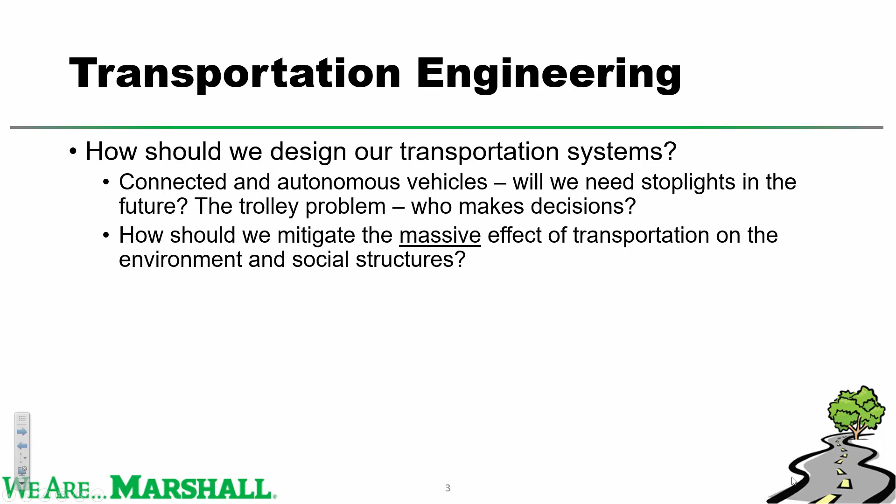Of course, how do we know what road to fix now versus 5 years versus 10 versus 15 years in the future? Can we use open source data and machine learning? Some of y'all might be very interested in computer science, and one beautiful thing we do in transportation engineering is we basically pull a lot from computer science.

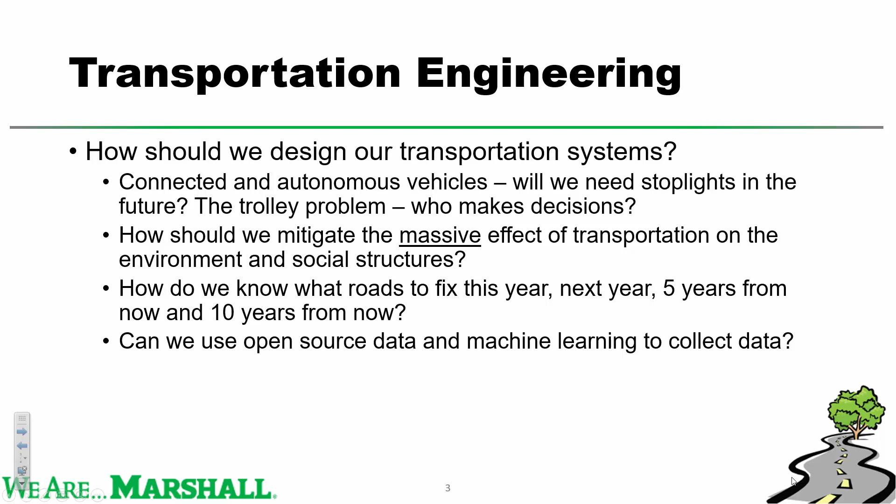So, with that being said, roads fail. We have all experienced it. So it's our job to try to figure out, and it's my job in research and studying and the courses that I teach, to try to better help you all understand how we should manage roads, if you come study with me. My lab is in 2301.

Weisberg 2301, you'll know you're there if you walk in and you see all the 80-inch flat panel TVs. It comes in very handy in March. So my office is inside my lab. Dr. Michelson, I'm sure, has my email address, and he can send it to y'all if you have any additional questions

Or any questions at all. Do you have any questions? Anybody have any questions for Dr. Bryce? Yes.

I do, that's actually, thank you for asking that question. I hire a lot of undergraduate student researchers, multiple per semester. I value it as an educational resource for the students, but also you help me out. I have a problem right now where Dr. Michelson actually offered to work with me on this, and I haven't gotten back to him yet, but I'll just put it out there. I know.

I got a problem right now where I walked into class, and I'm not kidding you, I walk in class, it's a 9 a.m. class, and I hear these words come out of a student's mouth. She says, 'Oh, I love statistics, but you know what was even more fun was my differential equations class.' Not even kidding you, that came out of her mouth, at which point I stopped and I said, 'How much can I pay you to solve this problem for me?'

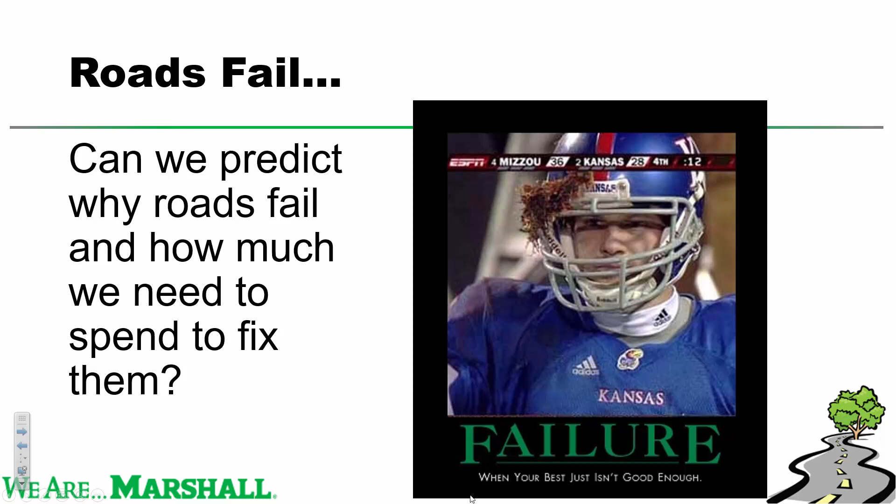And that's the best that Kansas will ever do. I'm sorry, Mizzou grad. Yeah.

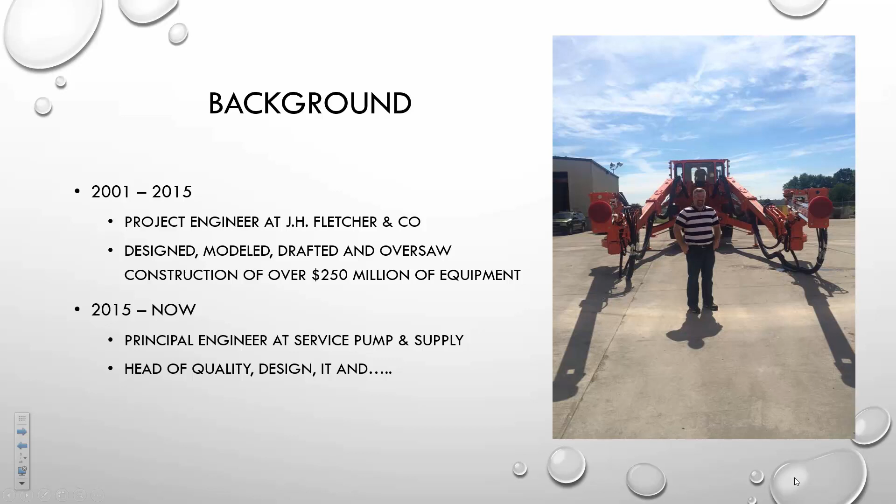I run all of our computer stuff. We've gone through a digital transformation of the company, going from a lot of paper to everything being on the computer and in Salesforce. I'm like our Salesforce administrator, I do all the quality and warranty work, and a lot of the design and sales work. So I kind of have a lot of hands at Service Pump.

So these are the four big things that I like to hit on with a class like you guys. It's the things that I wish I knew when I was sitting here.

The first thing is everyone in the room is smart, right? I'm sure a lot of you come from backgrounds where in high school you were probably near the top of your class, used to making A's, and that's why you're going into a STEM major in college.

So I graduated in '99 from Huntington High. There were 511 people in my class. I was fifth, and I got to Purdue, and I was dumb, right? It was not special at all. I was able to coast through high school, show up, get my A, and didn't have to do much. So I was a good kid, stayed out of trouble, showed up, got an A, had a 4.3, move along.

You can't do that anymore, right? You guys are essentially adults at this point, and you have to be responsible for yourself. A lot of that's going to class. No one's going to make you.

And Dr. Michelson would love to see you guys, and all your other professors, during your time here at Marshall. But the reality is that if you're living here on campus, living away from home for the first time, you're probably drinking a little, playing video games, staying up late, hanging out, have a new set of friends. No one's going to make you come to this room, right?

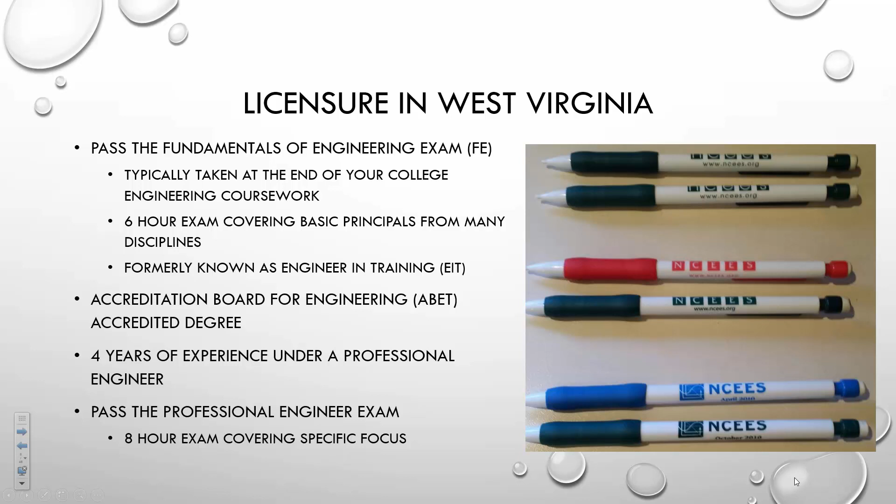At the end of the day, these are still important to me, and kind of a badge of honor for what you have to go through to pass these things, especially the professional engineering exam. I studied for every waking hour - lunch breaks, before work, after work, till I went to bed, all day Saturday, all day Sunday - for about 100 days ahead of the exam. It's a big deal. It's how you become a professional, and how you can essentially go to that next level and do something with the degree you guys are working towards.

So you might ask, what should I be doing now? As a student progressing through this, working as an intern - maybe getting a summer or winter internship - by the way, you should be starting to think about that now. You should be targeting companies you want to work for, writing them, and by the end of the year, like in December, if you want to work this summer, you should have a solid plan in place, probably by January 1. If you wait until May to go out looking, there's probably not going to be a lot of opportunities. So if you want an engineering internship this summer, start thinking about that now.

As a student in groups, or in an internship or a job, you need to be a good team member. Don't be the person dragging behind. Show up, do the work, contribute, and work hard.

The third thing - a lot of what you're doing is learning how to learn. By the time you graduate, you're not going to be able to walk into a job and already know how to do it, but you're going to know how to figure it out. If I give you a new coding language, or ask you to calculate whether a bridge is strong enough, you're not going to know offhand, but you'll know how to figure it out. So a lot of this process is learning how to learn, learning what questions to ask, and learning how to get to the end result you're looking for, as opposed to just being handed an answer.

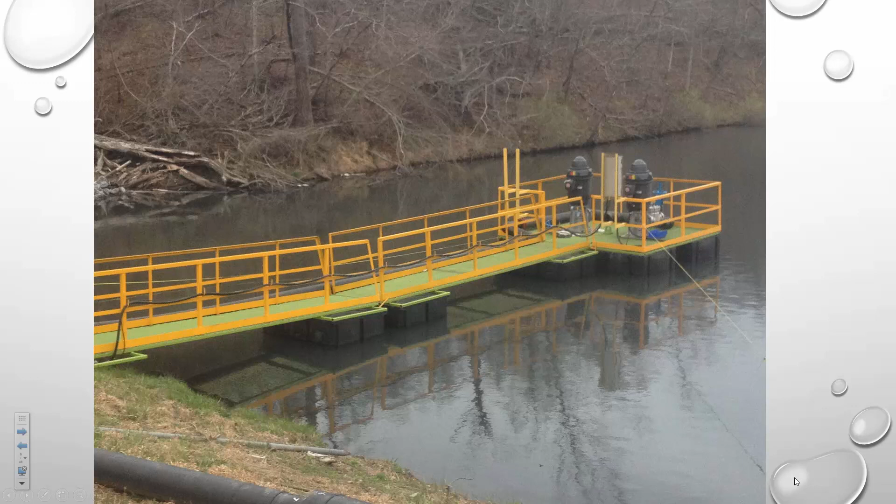Then the work experience. Here's a couple pictures of some projects I've done with Service Pump. We're in the West End. We solve water problems, kind of our motto, whether it's wastewater, clean water, or storm water. We fix things, we sell things, we build things, and we have a fab shop. We repair motors, we build panels, and we have a machine shop.

This is kind of a combination of all those things where you have to figure out how much stuff weighs, how much buoyancy you have in your floats, and do drawings for the walkways and platforms so it's big enough and you have enough space for your piping. This is on a lake somewhere, probably on a coal property, with two big pumps sitting out in the middle of the lake pumping water up into the mine. It combines buoyancy, structures, spacing, and planning, as well as the electrical theory behind running this and making sure it doesn't short out and meets all the safety requirements.

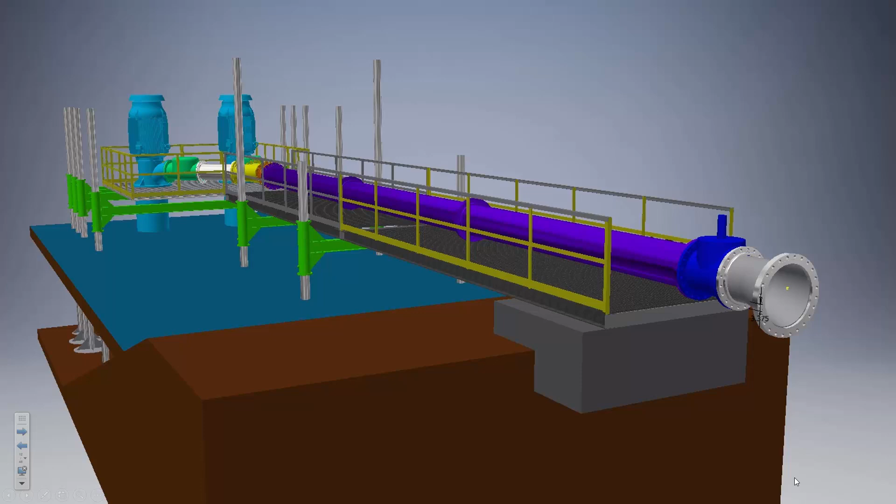So it's not only doing what you're asked to do, but figuring out what can go wrong, fixing what could go wrong, fixing that part again, and then doing it a third time—something else is probably going to go wrong anyway, so you've got to figure it out. But we had a little bit of foresight trying to figure out what the problem was.

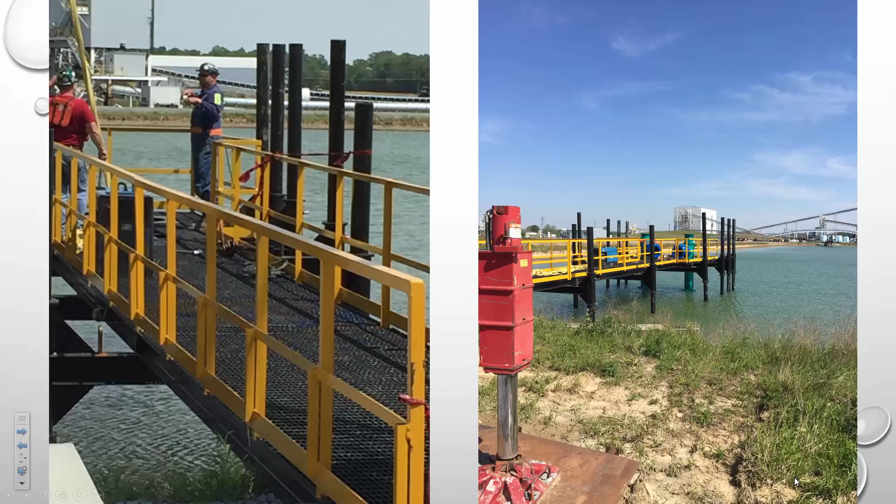This is the actual piece under construction—big cranes, welding it together, being out on the lake while we were doing this. This is a fun project.

It's another thing we did where they didn't even have a lake. So we made big cans to put the pumps in, dug a big hole, dropped these big blue cans down into essentially a hillside, and used a small creek to flood them. We kind of created our own pond, tied them together with this manifold at the bottom, and got gate valves and check valves to prevent backflow.

One of the lessons I learned from this one is that I undersized this manifold at the bottom, so the velocity of the water going through the pipe was too fast.

And what would happen is if I turned on all three of these pumps, the water being pulled out wasn't being replaced fast enough with the water coming in. We were pulling too much velocity through the pipe, and basically they would fight each other. You couldn't really predict which one was going to win, but one of them was going to get the water and the rest were going to starve. So we ended up having to dig it out and put a bigger pipe in to slow the water down, to flood each of these three wells a little bit faster.

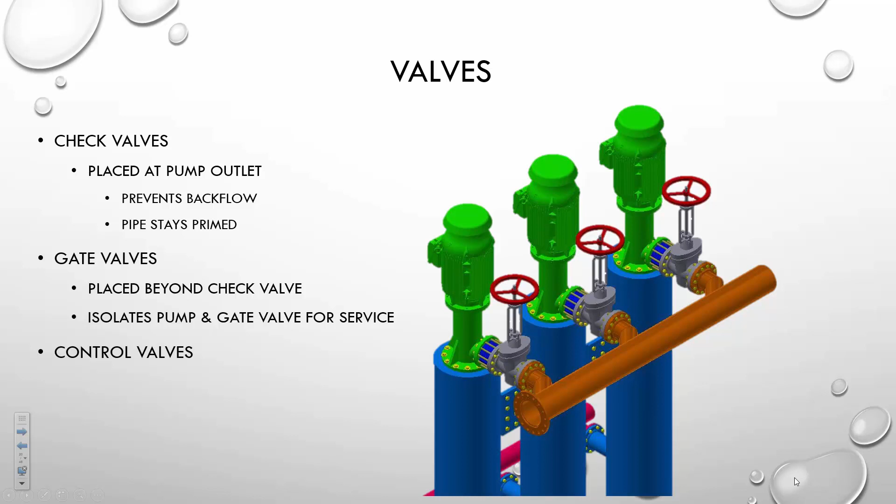Systems also have control valves. You'll notice that if you have a water main break here in town, it's probably going to happen at 2 or 3 in the morning. Saw a complaint on Facebook from someone saying they're jackhammering the street in the middle of the night, trying to sleep, asking why would you do that. The reason is that's when stuff breaks. It was actually the gas company - can't have a gas leak, they go fix it whenever it happens.

The reason things break in the middle of the night is because industry stops using water. The valves close, the water backs up, and when the water backs up, it builds pressure in the pipe. If all the valves are open, it's flowing - not a lot of pressure. But when you take your thumb and stick it on top of the hose, what happens? The pressure builds up. That's what happens in the middle of the night.

Not as much water is being consumed. Your faucets aren't running, your toilets aren't flushing. Everyone's sleeping for the most part, unless you're a Marshall freshman down on 4th Avenue. And so that's when stuff breaks, and that's why you'll see it. Pressure reducing valves can help that - you can put timers on them, things like that, to help protect the systems. They're expensive and they're preventative, and a lot of people in government react to things instead of being proactive about them because of funding. They can't afford to do that kind of work up front.

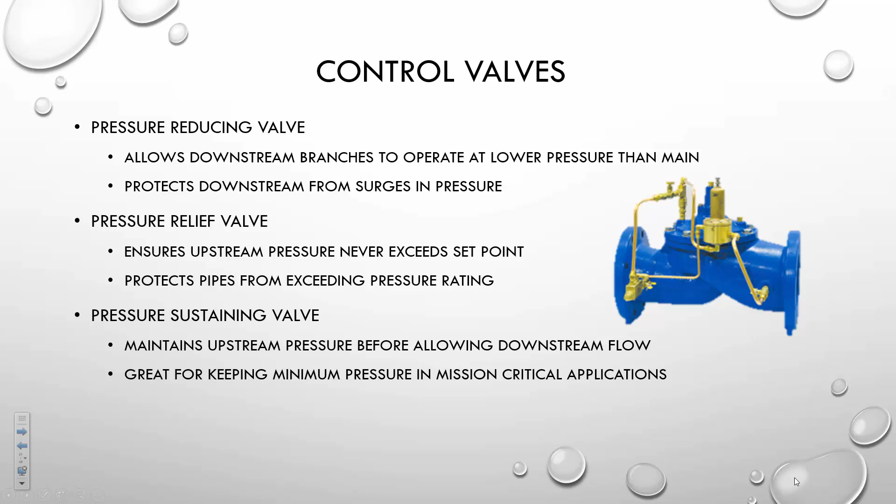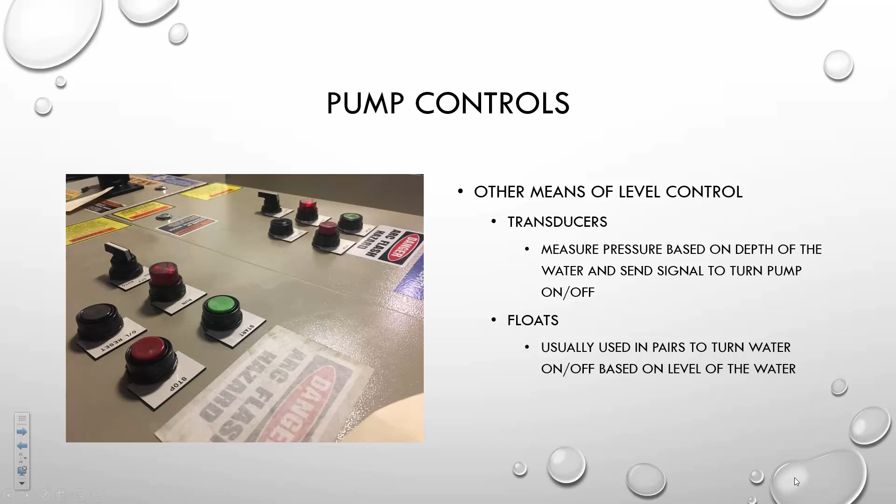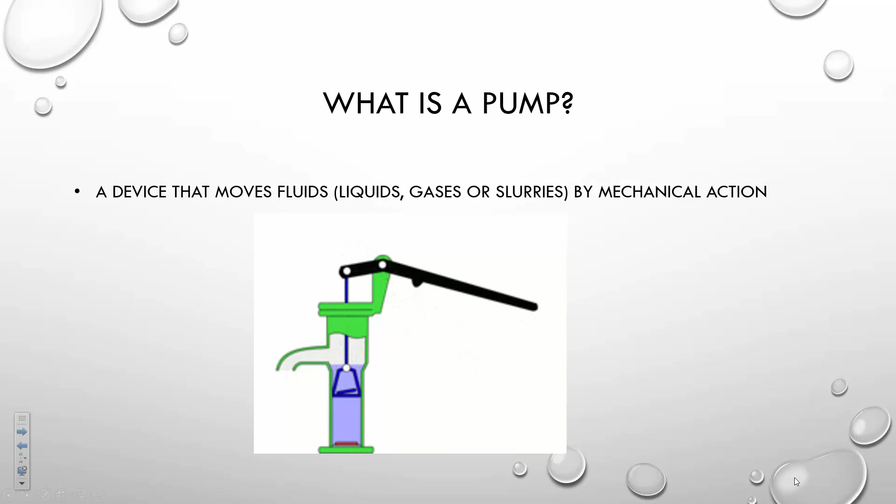There's a lot of different kinds. A lot of them are centrifugal, meaning they spin, just like a hurricane. You see on the Weather Channel, the hurricane - the center is the low pressure spot where all the air gets sucked in. Same thing with the pump. In the middle, it's spinning. It's not turbulent, it's low pressure. As it spins, it increases the velocity of the water going out to the sides. That velocity is in turn turned into pressure, which allows the water to move faster. When the water's moving faster - Bernoulli's law - it gets to go higher. That's just the way it works.

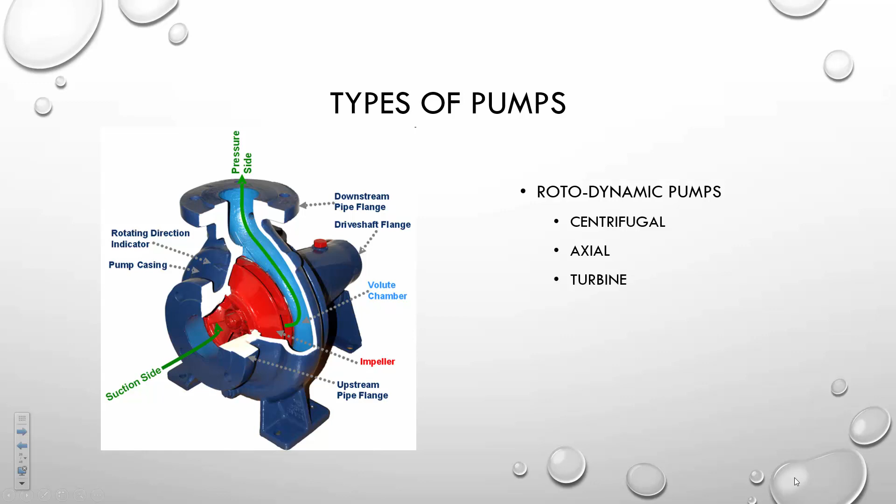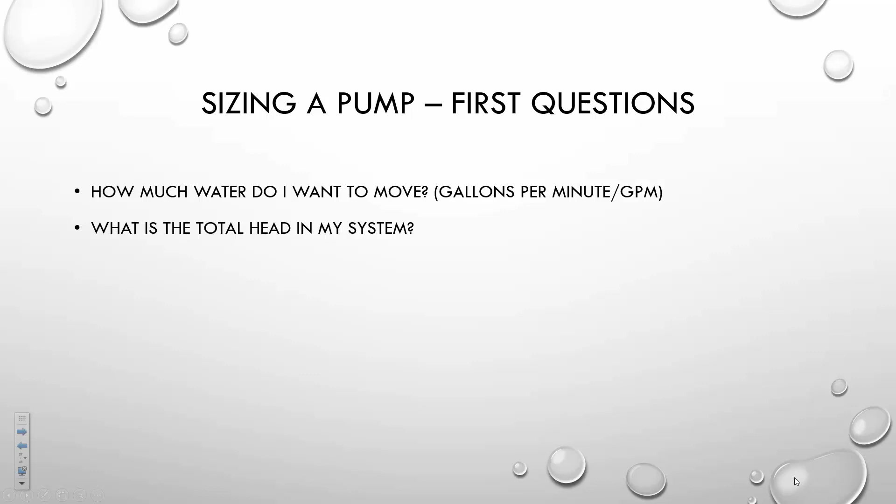It doesn't know how far, it doesn't know how high. All it knows is how hard is it for me to push against my outlet. Do I have a thumb on it? Do I have a stick on it? Do I have nothing on it? Do I have a million miles of pipe? It doesn't know the difference.

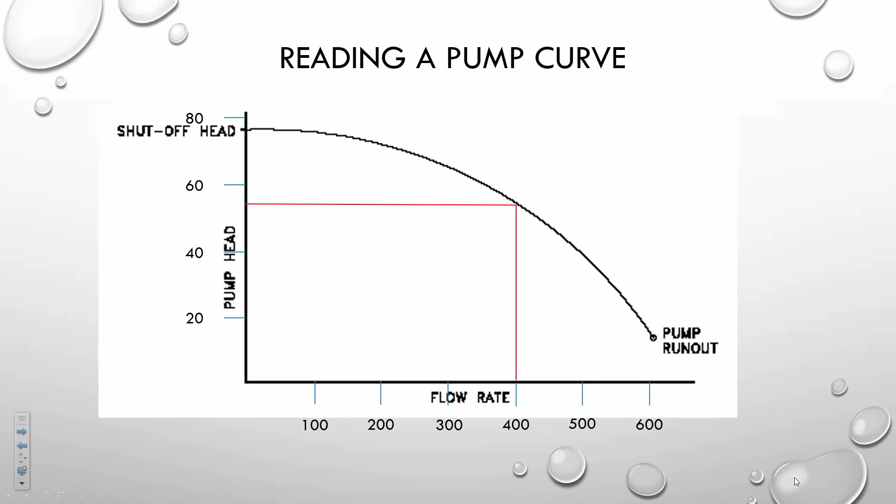So when a pump feels this much pressure, this is where it's going to run at. It's going to run that much flow, right? So this one's going to run at 55 feet of head at 400 gallons.

Like I said, feet of head is a term commonly used for the pressure. It can be converted into PSI. 1 PSI equals 2.31 feet of head.

From a practical standpoint, if you took a colander or a graduated cylinder, and at the bottom of it, if it was 1 square inch of area, and you poured 1 pound of water on it, the pressure would be 1 pound per square inch, 1 PSI. It would physically fill that column 2.31 feet.

And so one day I'm going to build one of these, because I think it's one of the few examples in life of a real, physical, visible conversion factor. But that's what it is. It's used interchangeably - most people talk in feet.

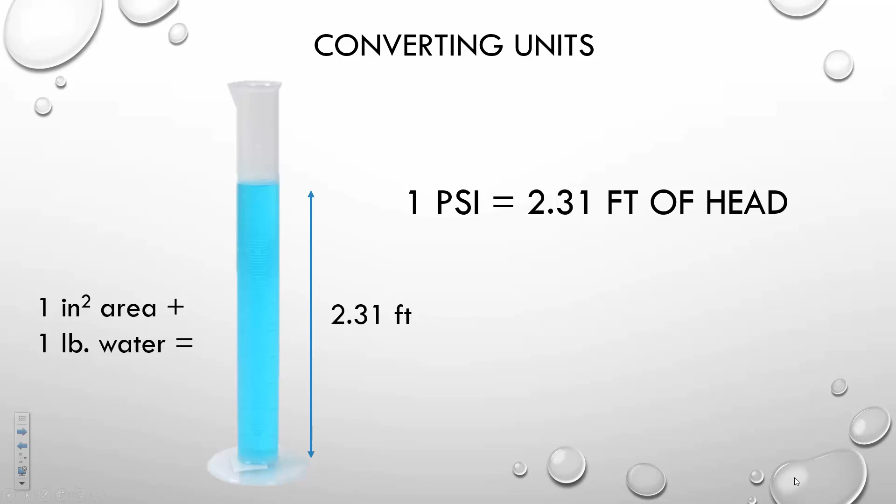So your head has 2 components. Static head, which means how high am I going to lift it, how high is the mountain I'm trying to lift? And friction head, how hard is it for me to go through the pipe?

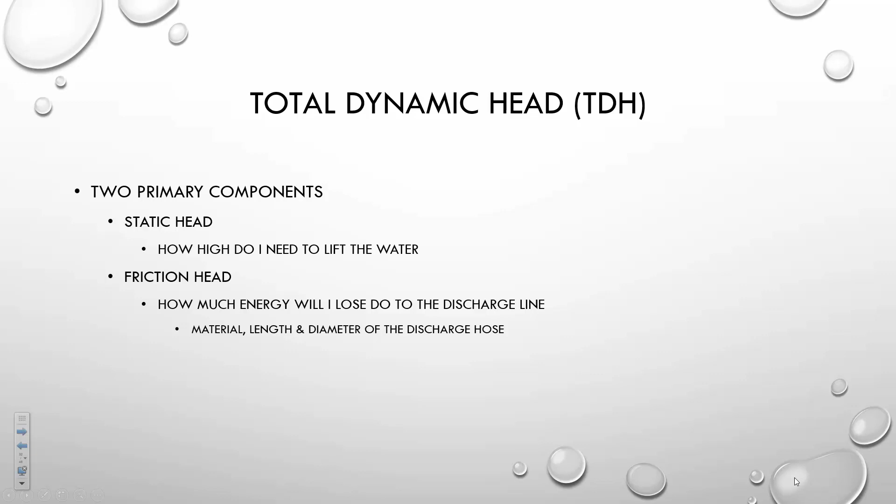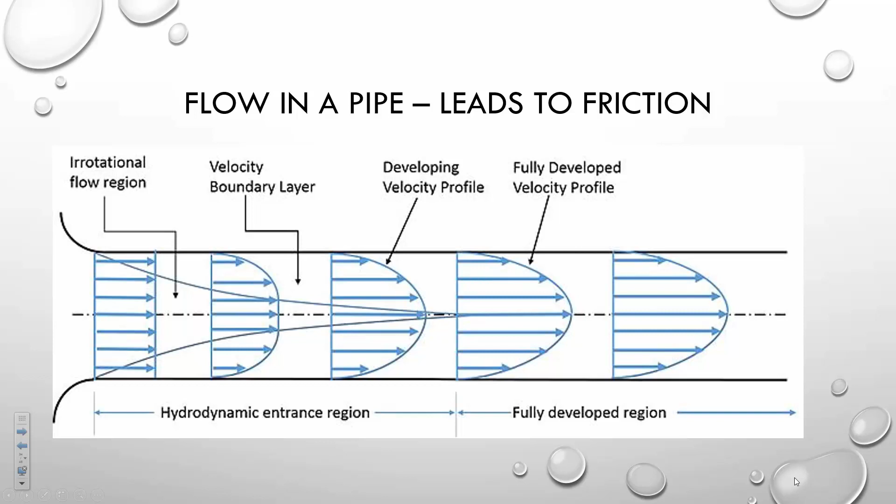You have a pipe, the water's going through it, and the water's grabbing the edge of the pipe. The faster it goes, the more uniform the water flows through it. The stuff in the middle, nothing's touching it - it's going really fast, so it's going through pretty cleanly. The stuff on the edges is getting held back, like rubbing your hands together or dragging your feet on the floor. It goes slower. So this is friction.

The other part's static head - how high am I lifting it? Here's our pump, here's our water feeding our pump, and this is how high it's lifting it. So those 2 components, static head - how high am I lifting - and friction head - how hard is it for me to pump - that's how you calculate your total head.

This picture here, there's something wrong with it though. How high does this water have to be lifted to get from this point to this point? It says that this is the static head, from here to here. Is that true? You guys, can you figure out what's wrong with the picture? How do I get the water into this tub up here?

Yeah, it goes through the pump on the bottom, and then where does it go? Up the pipe, right? How high up that pipe does it have to go to get to right here? Let's go really up there. If this pump was just calculated so that all it could do was right here, that water would be stuck in that pipe right there.

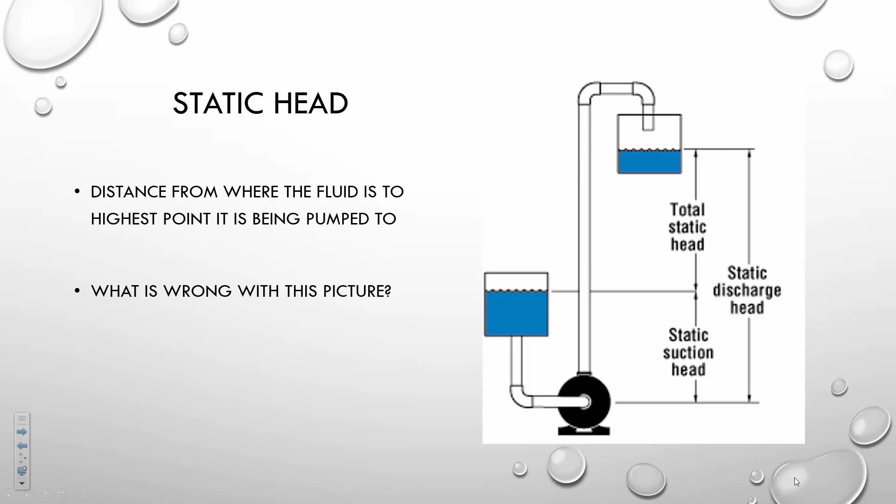But I found the picture on the internet, so it has to be true, right? So anyway, this is wrong. This should be drawn up to the bottom of that pipe. That's the static head - that's how high I have to lift in order to actually get the water up into that upper chamber.

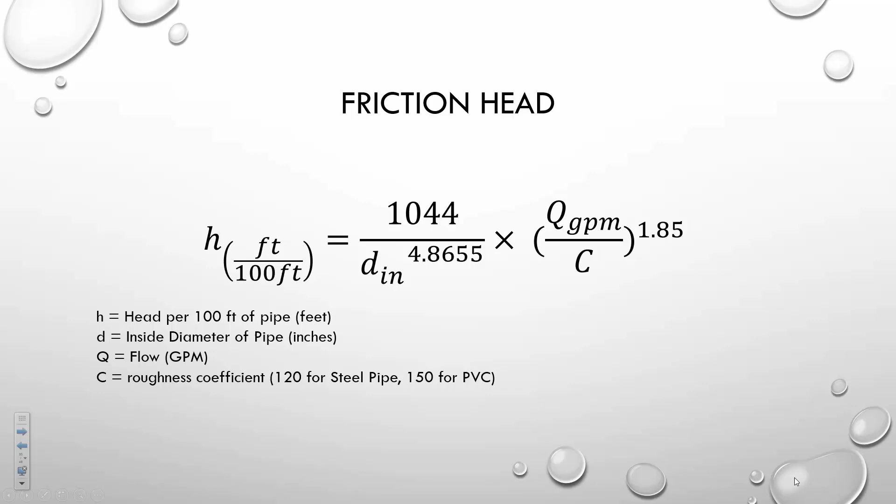Friction head has this fancy equation. C is a constant based on the material of your pipe, whether it's plastic or steel, old or new. Q is your flow, D is your diameter.

So I'll go through a quick example. If I have 700 gallons of clear water, which matters because of the specific gravity of water, through an 8-inch SDR11 pipe - that's the size, that's the thickness of the wall - the pipe is 10,000 feet.

What's the system? So I take these levels. This is what the inside of an actual 8-inch SDR pipe is, that's the measurement. Here's my 700 gallons, and this is the coefficient that comes with that style of pipe. I have 1.871 feet of head per 100 feet.

Per 100 feet, but I have 10,000 feet. So my friction head for this system, I have to multiply it by 100 to get up to my 10,000 feet. My friction head is 187.1 feet of head - that's the friction head created from this flow through that pipe.

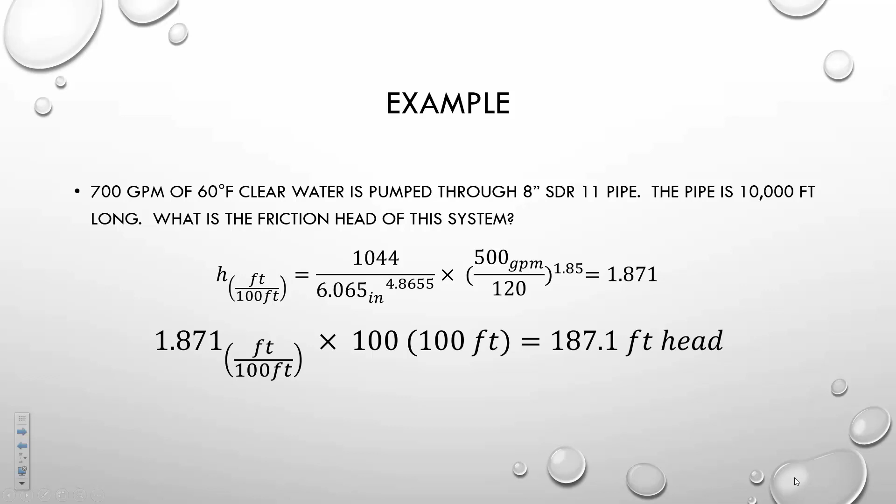And so if my pump was trying to additionally pump that 10,000 feet through that 8-inch pipe, and from where the pump was to the top of the hill that it was pumping up to was 25 feet, my total system head would be 212 feet. I have to take my static head, my friction head, and combine them.

I don't do any of that. I made an Excel spreadsheet. I type in 4 numbers, I pick a pipe, and I size it. So this is what you do once you know how to cheat, so I don't have to do all that calculation over and over again. But if you don't understand how this stuff works, the equations behind it, the theory behind it, none of it matters. You don't just get a book full of Excel sheets in order to be an engineer. You have to actually understand the principles behind it.

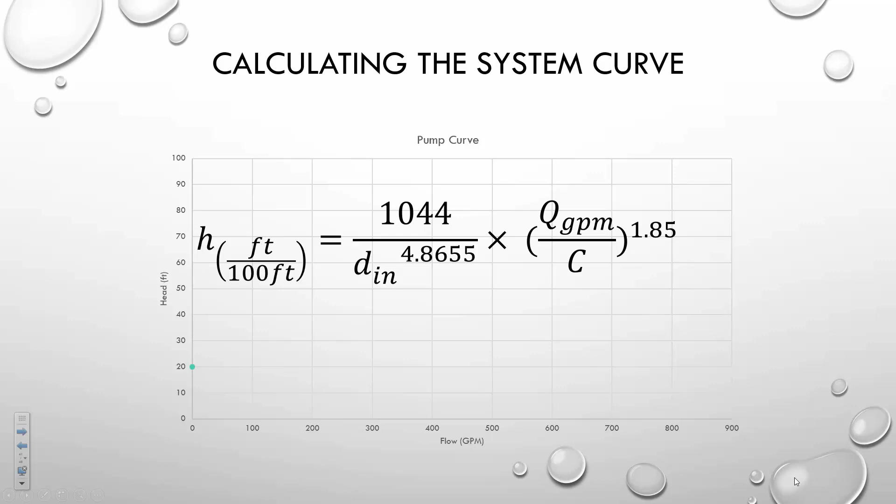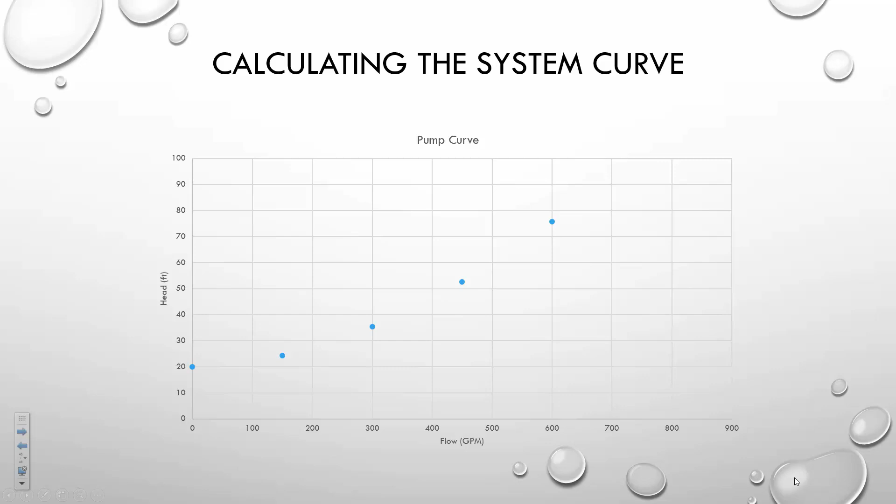To calculate that system curve, I'd take that equation and go through iterations. I'd start with zero flow. At zero flow, everything's 0, so I just have whatever my static head was, which is 20 feet, that mark there. But then if I made this 150 gallons, I'd have a little bit of friction head, so it would go up a little bit - my 20 feet plus whatever my friction head is for 150 gallons. I'd do it again at 300, 450, and you'd see these dots become a line. This is what my system's actually going to do - this is what the water flowing through the pipe will actually look like.

This black line comes from the manufacturer of the pump - this is the pump curve. This is what the pump's going to operate at, at whatever pressure. Wherever my system curve intersects with my pump curve, this is what is actually going to happen in the real world - this is where the pump's going to run. This pump's going to produce 475 gallons, and if I put a pressure gauge on it, it's going to be at 50 feet of head. So some customers say, hey, I need 400 gallons - well, you're not going to get it perfect. You have to find what's the best fit. The best fit requires all these pieces coming together at the same time and figuring out where it will actually run.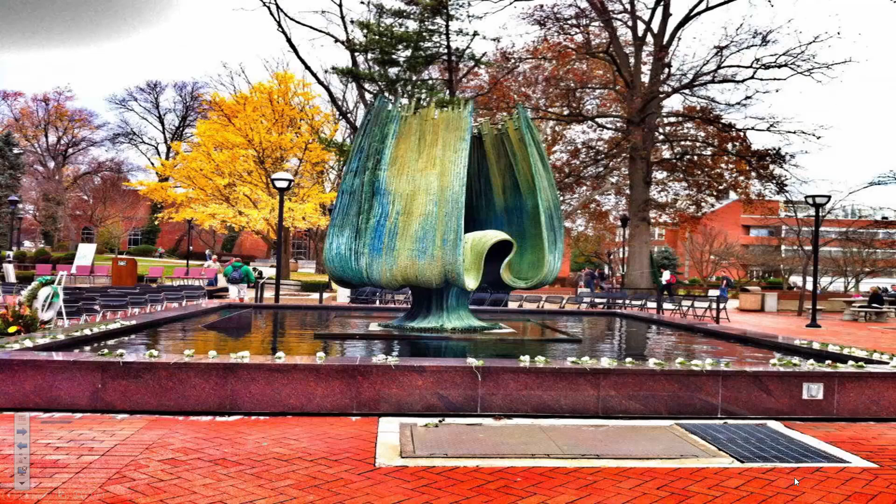This right here - how many have seen this thing before? All right, you guys know what this is? It's the memorial fountain. How many have noticed this before down here? This is where the pump is - there's a water pump that runs this thing. They turn off the power to this thing every November 14th for the ceremony. Underneath this, there's pipe work, there's valves, there's controls. This down here is what makes this actually work.

And so there's decorative things for pumps, but there's also pumps for your wastewater, pumps for your clean water. Turn on your faucet, you flush your toilet - pumps are what make all that stuff actually work.

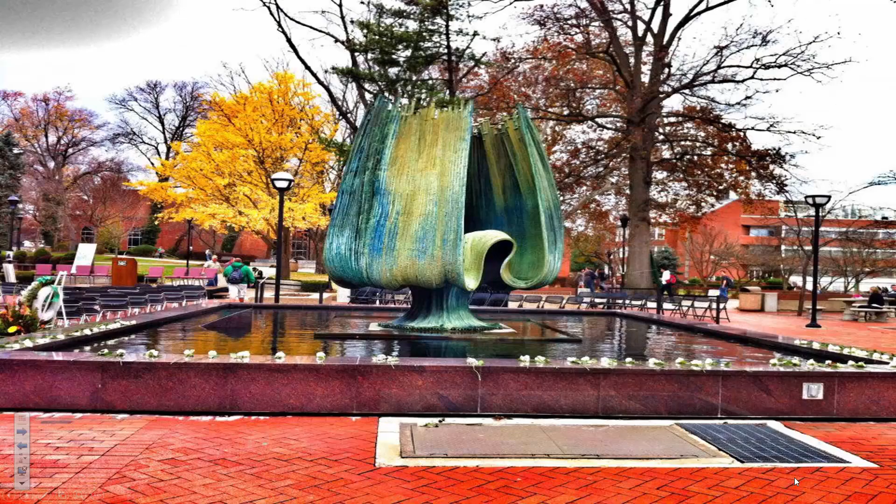I do. When I was at Fletcher, I used it every day of my life. I use it a lot less now, I miss it. But at the end of the day, it's just a bunch of squares and circles put together to make shapes. Like that big machine from the beginning - it's a $700,000 machine. I've done, I don't know, several $100 million worth of equipment, and it's all drawn in CAD.

I come from a family of lawyers, and a lot of times I ask myself, if I get deposed—this is what happens when you get your PE stamp. If I'm sitting in front of a lawyer and something fails, and he asks me why I did something, I need to be able to answer that question. That doesn't mean I have to be right. It doesn't mean, hey, you made a mistake here, and yeah, you're right, I did. But at the end of the day, when you're designing something, like a parking garage, if it fails and kills somebody, you can go to jail.

So you have to understand what it is that you're doing, and more importantly, understand what you don't know. Know when to ask for help, whether it's as a student or professionally. Know where your line is. But yeah, I mean, I like drawing stuff. I don't get to do it as much as I used to. I miss it.

Do you have any undergrad or entry-level positions open at all? Not at the moment, not at the moment. But yeah, it's something that we look at.

And we would post through the engineering department when we did. That's another reason that if you ever get an email from Lee McDonald, open it and read it. I just had an email sent this morning where there's a company in the area looking for juniors and seniors. So the juniors and seniors all got that from them, and if they didn't open it, they didn't see the position. So when you see an email from her, open it.